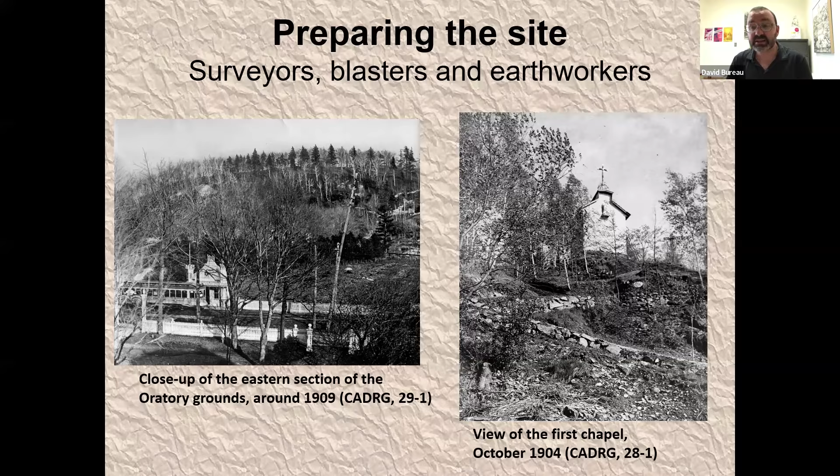When Brother André was appointed guardian of the shrine in 1909, he moved into the small pavilion on the left of the picture near the chapel. With the arrival of the first chaplain, Father Adolphe Clément, the oratory began its activities as we know them today. The monastery for the permanent religious community was built in 1912.

By the following year, 1913, the demand for a larger church had already emerged, supported by $53,000 available in funds. Land surveying work began shortly after.

Brother André personally hired the workers to build the first road for vehicles. 6 or 7 earth workers carried out this work using dynamite. They were also employed for the excavation of the crypt church foundations, which began around 1915.

Father Auguste Dion, the rector of the oratory in 1912, recounts these works in the Oratory Chronicles. I quote, "The blasts that shattered sections of rock to make way for the great crypt church exploded like thunder and machine gun fire one after another."

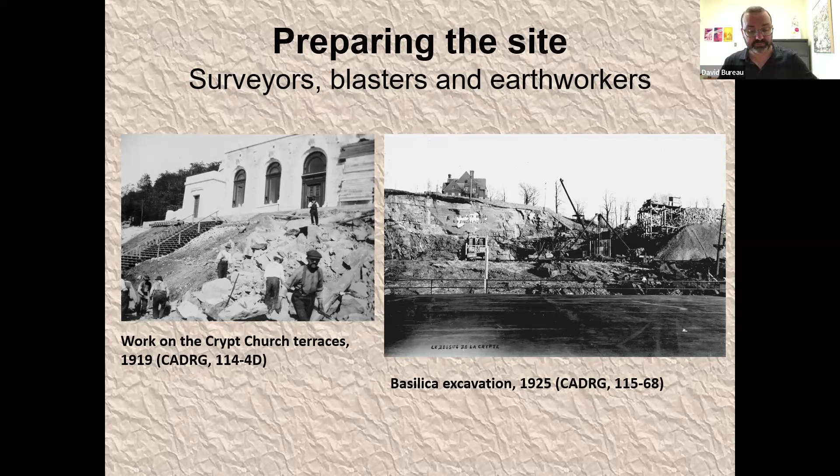The rest of our tour will not always follow a chronological order. We will cover the main features of the principal building: the chapel, 1904 till 1913, the crypt, 1915 to 1917, and the basilica, 1924 until 1938.

So let's start with the primitive chapel. The primitive chapel, the very first chapel, was the oratory's earliest wooden structure. It is the structure you can see on the picture in the center and the right of your screen. It was built by Brother Abondius Pichet, a skilled carpenter born in 1862, who worked at the Collège Notre-Dame.

He began the construction on July 28, 1904, and completed the project by mid-October of the same year. The chapel measured 18 feet long by 16 feet wide and stood 25 feet high. It was a very simple structure, but Brother Abondius covered both the interior and exterior with embossed metal sheet. There was no steeple and no windows, just frosted glass panes that allowed a bit of light to enter. In any case, masses were celebrated outdoors when weather permitted.

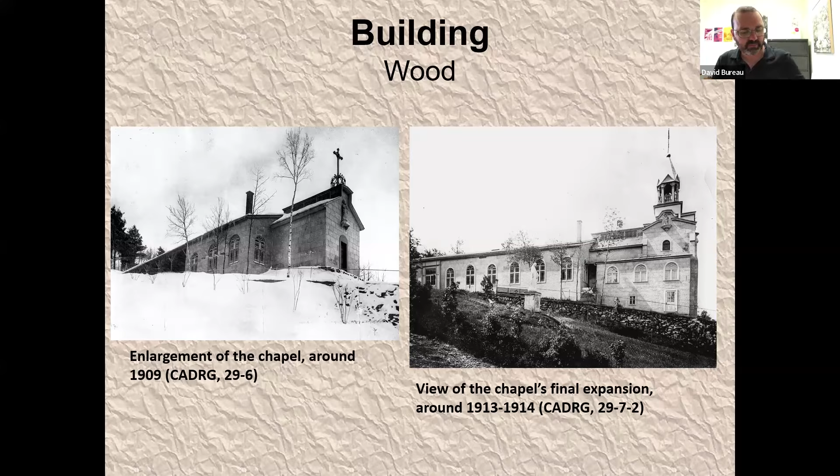It goes without saying that wood was also essential for the framework, for formwork of all the major constructions to come. The crypt church started in 1915, the foundations of the Basilica beginning in 1924, as you can see on the picture, and of course, the dome's formwork in 1937.

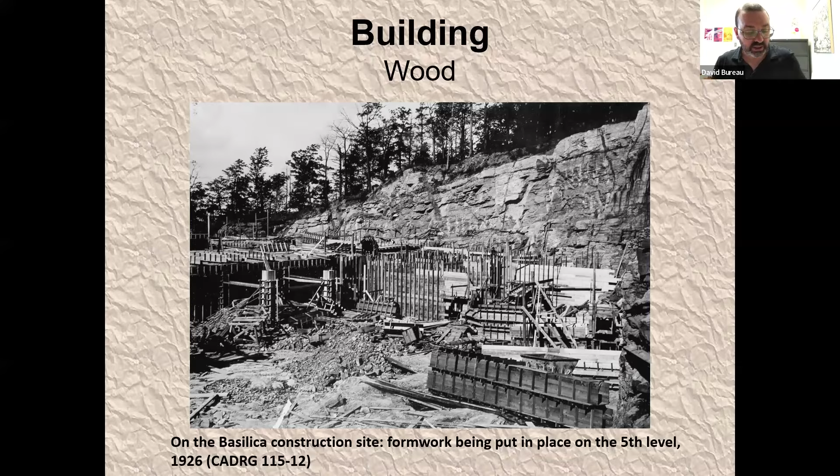The oratory's major buildings were constructed at a time when world events were causing upheaval across the globe, which significantly slowed down construction work. These events included World War I, the economic crisis of 1929, and World War II.

During those times, resources became very scarce. A large-scale project such as the oratory required very tight management of expenses and resources. Throughout these years, pilgrims and friends of Brother André were important pillars for the construction process.

In 1915, Ulrich Boileau and Brothers Company, contractors from Montreal, were awarded the contract to build the crypt church. The cost of construction reached $175,000, not including the interior furnishings, which were estimated at an additional $30,000.

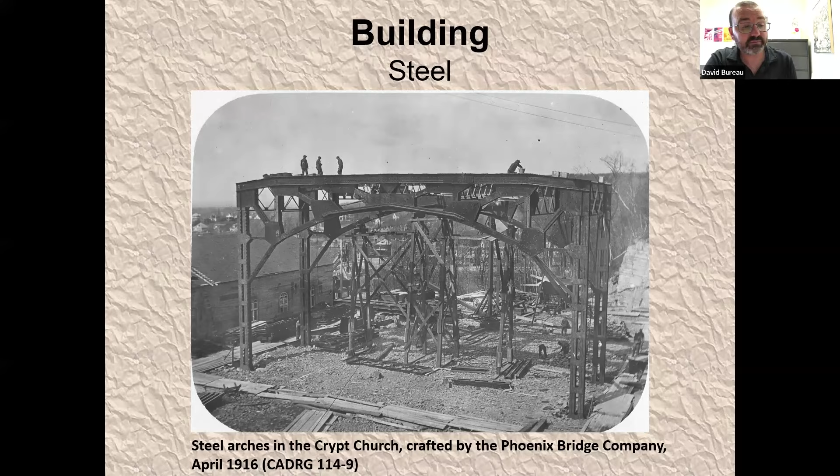Ulrich Boileau erected a steel framework to support the crypt church. On May 14, 1916, during the cornerstone blessing ceremony, the massive steel arches were fully visible. In fact, the celebration was held outdoors, right beneath the imposing metal structure, as you can see on the picture.

Given the expertise of the workers who had built the massive steel arches and were working for the Phoenix Bridge Company, the oratory entrusted them with the installation of the statue of Saint Joseph in the crypt church on December 6, 1917. It is the same statue that we can still see today at the oratory's crypt church.

The annals recount that the industrious workers had already begun setting up the sturdy scaffolding and chains in the heart of the shrine, all necessary to carefully lower the statue of Saint Joseph into place above the center altar.

Steel became the backbone of the basilica's construction, as you can see on this picture. From 1926 to 1937, even as progress slowed and sometimes came to a standstill due to financial hardship, Dominion Bridge Company and their consulting engineer, Ernest Loignon, continued assembling the building's steel structure.

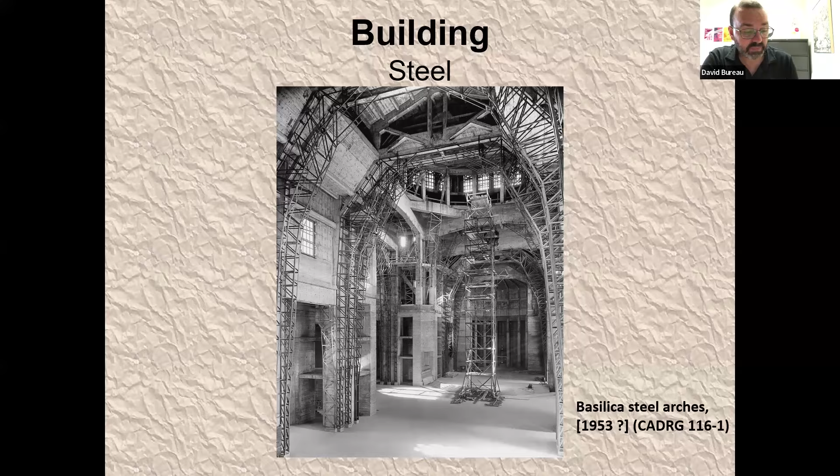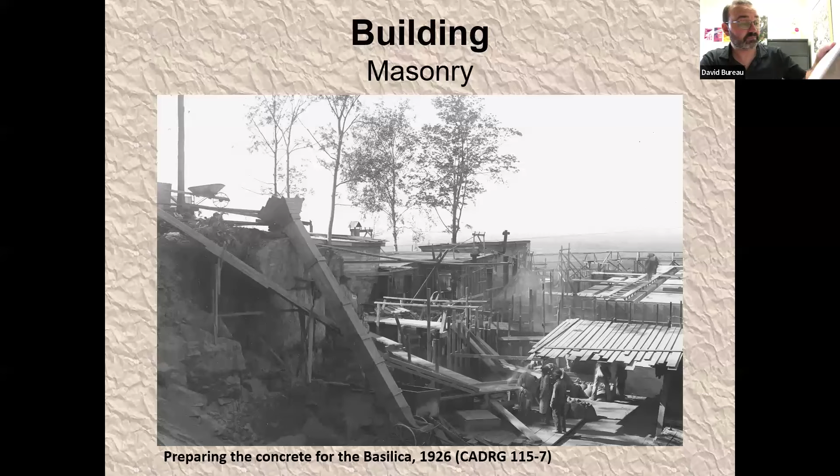Until now, the workers have appeared only rarely in photographs. With the construction of the basilica, the granite walls, and the concrete structure, they increasingly appear in the construction site photographs. Often, these workers were not employees of the oratory itself. They came from construction firms contracted for specific projects. Their names were seldom recorded, but a list dated 1937 gives us a rare glimpse into some names, a few trades, and fragments of their identities.

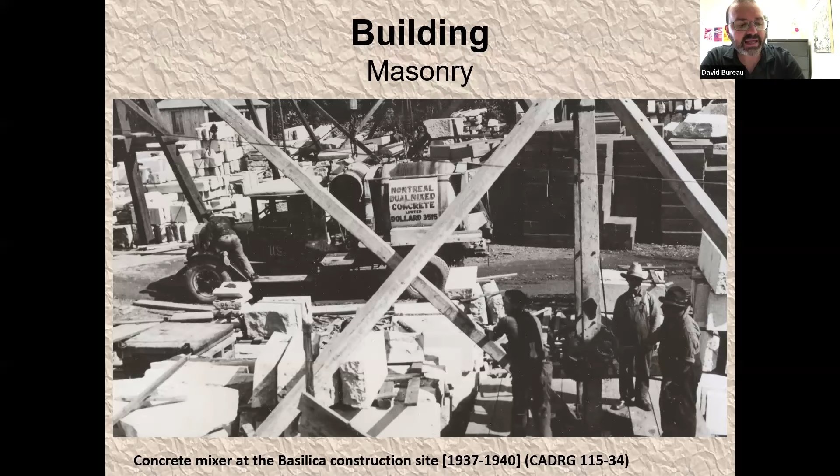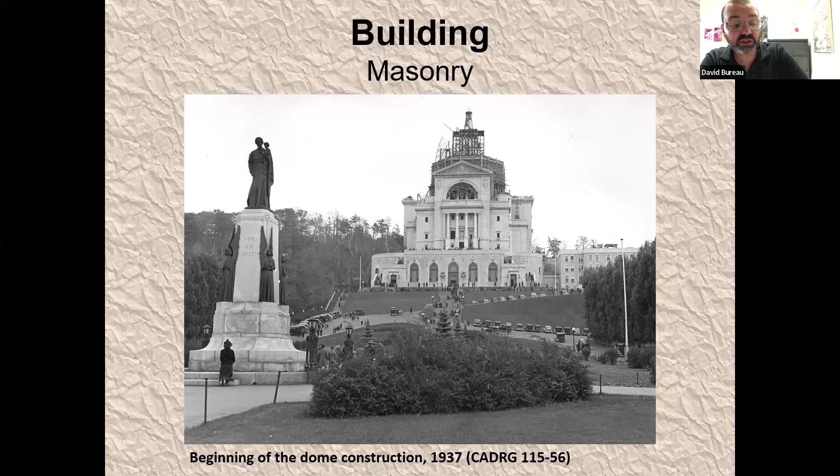As the 1930s drew to a close, the oratory entered a period of intense construction. The will to see the basilica completed was strong, not only among the priests and pilgrims who had nurtured the project from the beginning, but also within the leadership of the Congregation of Holy Cross. There were mounting concerns that delays might lead to insurmountable debt. While progress had resumed steadily after 1934, it was the death of Brother André in January 1937 that brought a renewed sense of momentum. From that moment on, the pace of construction picked up dramatically. The site buzzed with activity.

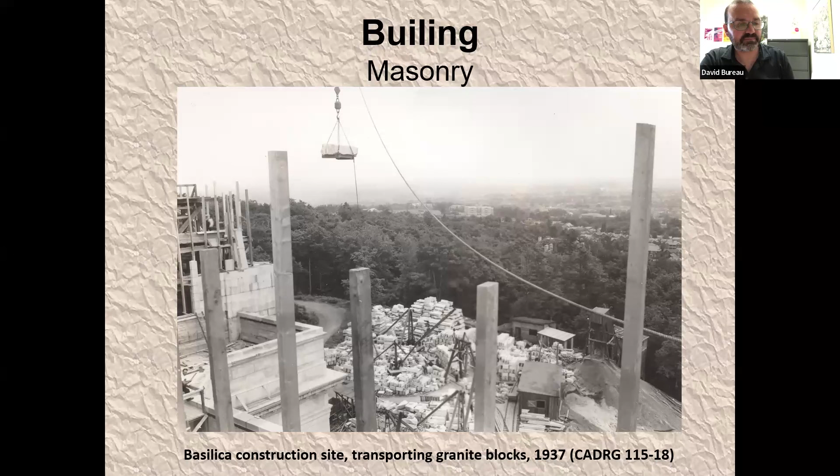Workers from dozens of companies like Silver Granite, Gunite and Waterproofing Limited, Otis Elevator, and Montreal Architectural Iron Works labored day after day. One of the most spectacular phases was the rising granite walls. The stone, a beautiful gray granite, came from Lac Drolet in the Lac Mégantic region in the eastern townships. As early as 1931, construction was underway on the lower floors of the basilica. Granite deliveries came one after another, quickly filling the area around the site. The surroundings were cluttered with stones, blocks, and heavy machinery, all set to feed the steady rhythm of the work. Masons, roofers, construction laborers, each played their part.

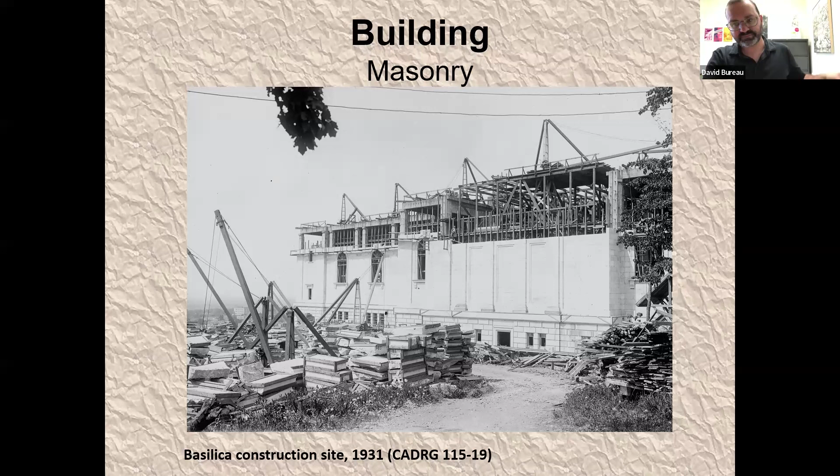We now come to a very important aspect of the construction of the basilica, the dome. A few words to say that its construction was quite eventful. The death of the architect Alphonse Venne before the project was completed led the oratory authorities to terminate the contract with his firm and thus abandon the original design of the dome, which was much more like the dome at Église Sacré-Cœur in Paris, or even the Senate Dome in the United States. Another architect was hired, the monk Dom Paul Bellot, who gave the dome the shape we know today. The dome is the signature of the oratory's silhouette. It was still just a dream when Brother André died. It wasn't until the fall of 1937 that the immense wooden framework needed to pour its concrete shell began to take shape. It is the structure you see now on your screen.

For months, the Congregation of Holy Cross relied on its community, calling on readers of the Oratory's magazine, to help fund this final phase. It was increasingly urgent to protect the basilica, which had long stood open to the weather without having a roof. And every winter, the risk of damage grew more serious.

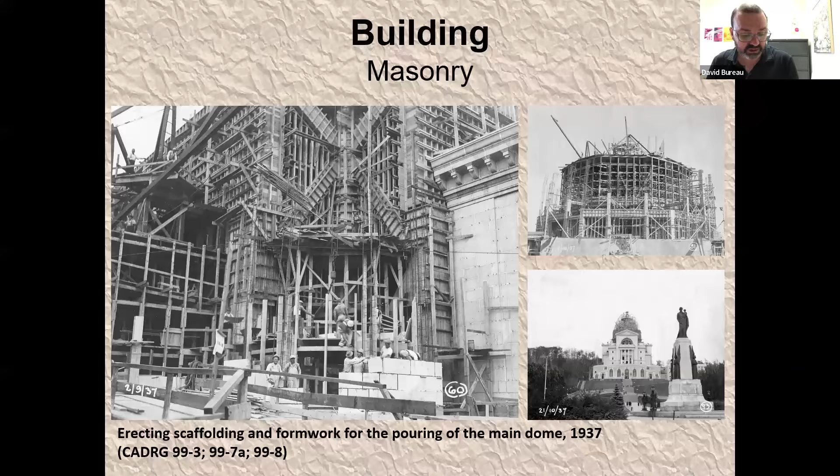It may come as a surprise to you, but the oratory doesn't have just one dome. It has two. The majestic copper-covered dome, seen from miles away, is only the outer shell. Inside it, there is another dome, smaller but no less impressive. It is the one visible to visitors standing beneath it in the basilica, inside. Between the two, a vast echoing void. At the top of the inner dome, a steel framework rises to the lantern perched atop the outer dome. Both were built in solid concrete.

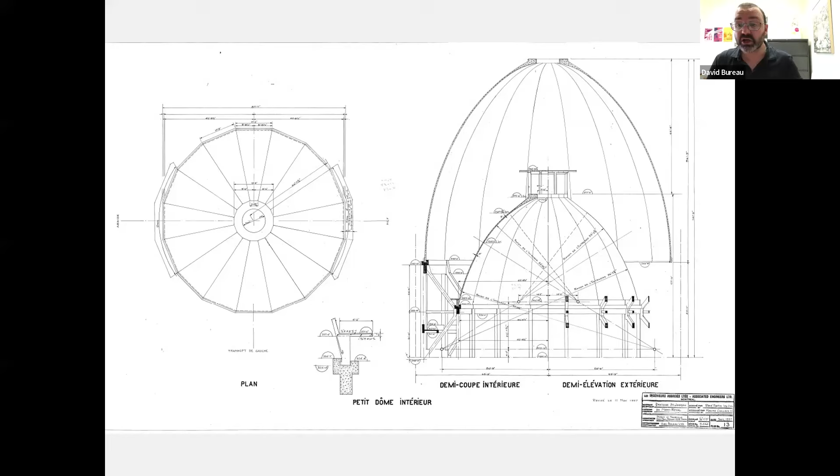From October 18 to 24, 1937, workers constructed the wooden formwork that would hold the concrete for the oratory's main dome, the one we can see from the outside. This was a major challenge, as it was vital not to weaken the concrete. To ensure this, the engineer Maxime Caillou planned one single continuous pour. The machines would pump the liquid concrete to the top of the dome, allowing it to flow down to the base without interruption. Multiple layers had to be avoided. The aim was to create a continuous shell.

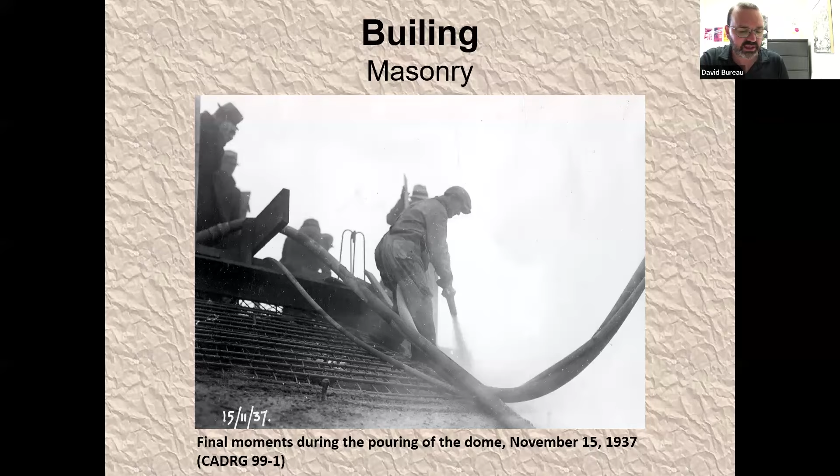So the operation began on November 6, 1937, and lasted 10 days, ending on November 15, 1937. Teams of workers and Holy Cross brothers rotated in shifts to supervise the flow, maintaining the right pressure and ensuring the temperature of the hoses remained constant. Even a slight drop in temperature could cause the concrete to cool and harden prematurely, blocking the lines.

The completion of the basilica does not mean that the oratory is operational yet. There was still much work to be done, including the Gardens of the Way of the Cross and the votive chapel. The oratory will not be truly finished until around 1967, when the decoration and layout of the basilica will be completed. We will now leave the construction site aside and take a look at the maintenance and daily operation of the oratory. What we're about to present relates to the situation of the oratory in the early 1960s.

It is time to discuss the presence of lay people in more detail. Although we do know that as early as 1908, a man who was not a member of the clergy, Mr. Joseph Savage, was working on the maintenance at the oratory.

Up until the construction of the basilica in 1938, most labor was supplied by general contractors. But once the building was completed, the oratory's rectors increasingly relied on their fellow Holy Cross brothers to handle maintenance and upkeep of the site. Faced with the sheer scale of the task, it soon became necessary to reinforce the religious workforce with lay employees, including increasingly lay women. By the 1950s, the number of employees had grown to nearly 200 people.

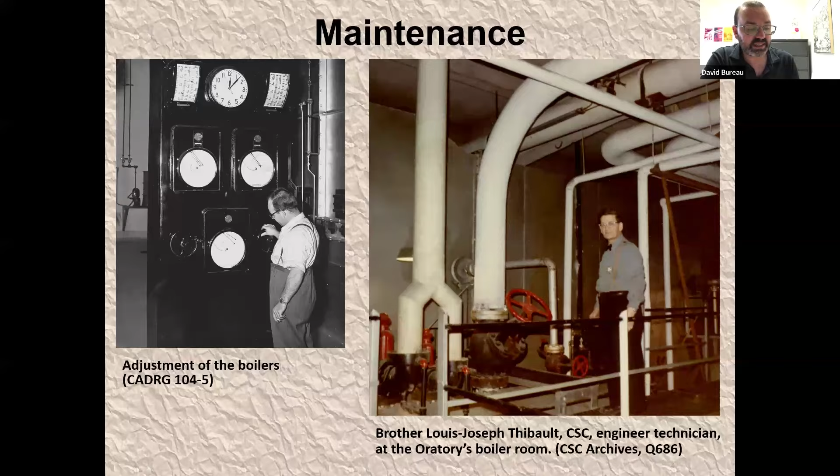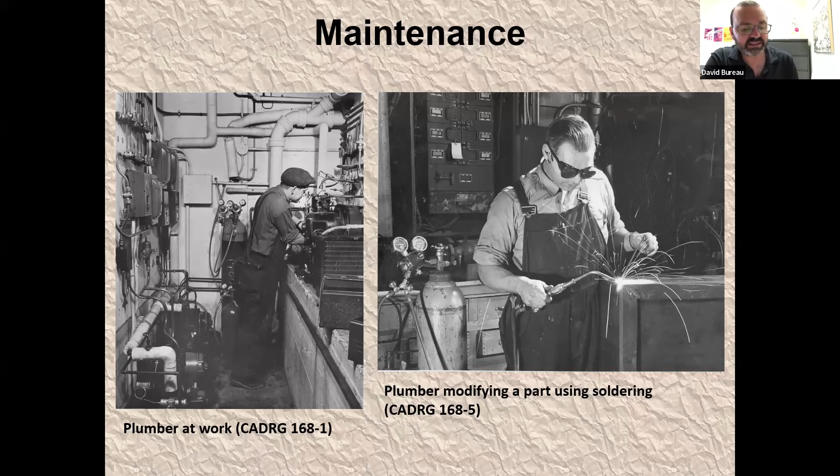Many mechanical and plumbing components were manufactured at the oratory by the brothers themselves. The plumbers were responsible for maintaining 30 refrigeration units and nearly 200 mechanical ventilation systems throughout the site. Plumbing and heating naturally went hand in hand, especially with the installation of the Basilica's radiant floor heating system.

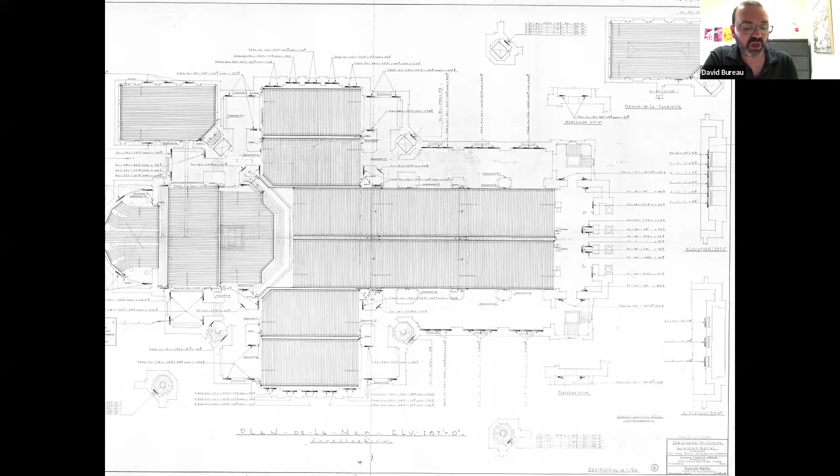It is the drawing you see on your screen now. The black lines that you see are actually the system's heating for the inside of the basilica. This is the plumbing that you cannot see because it's all underneath the floor of the basilica. It was quite innovative for its time, and this system ensured a comfortable warmth to pilgrims throughout the winter months. It was also an aesthetic choice, eliminating the need for bulky radiators along the walls.

The shrine used some 6,000 light bulbs, and it's up to the electricians to keep them all in working order. Their responsibilities included ensuring proper lighting in all interior spaces, like the chapel, the crypt church, the basilica, the offices, the corridors, the restrooms, the museum, as well as overseeing the nighttime illumination of the basilica itself.

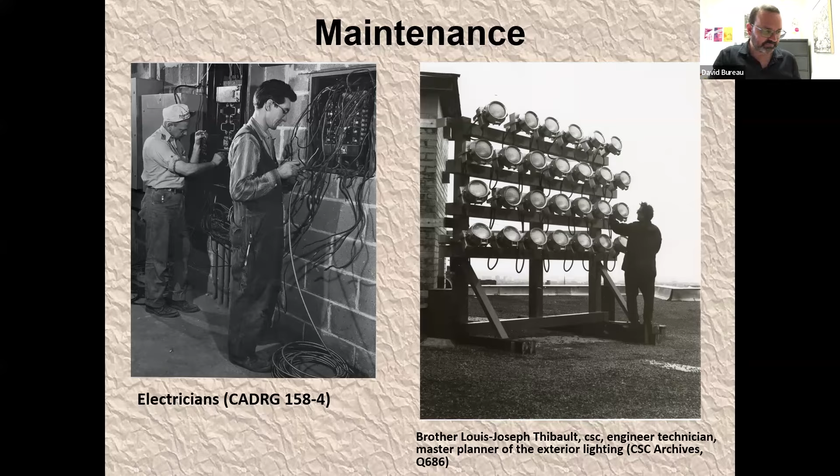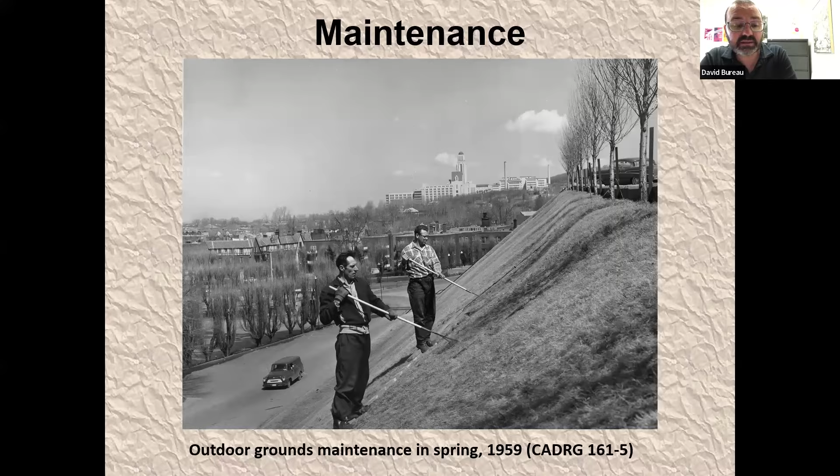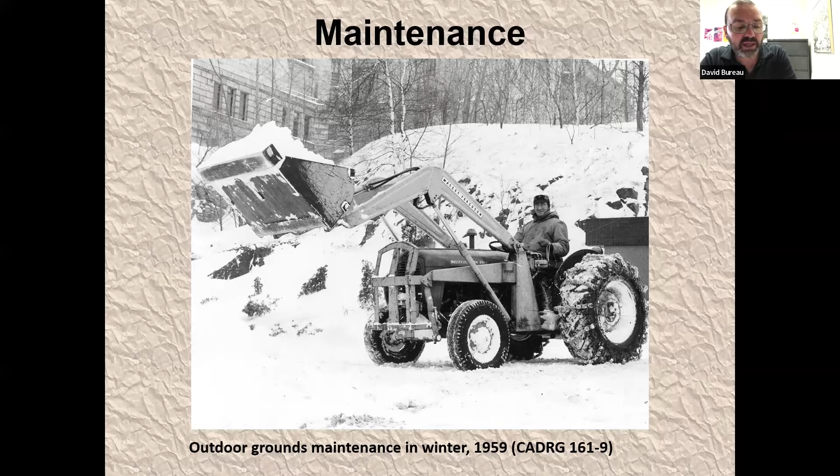Maintenance also includes the care of the oratory's outdoor spaces: flower beds, walkways, the garden of the Way of the Cross, trees, and landscaping, all tended during the warmer months. And the same holds true in winter. The oratory's mission never pauses. It must remain accessible at all times, no matter the challenges posed by the weather.

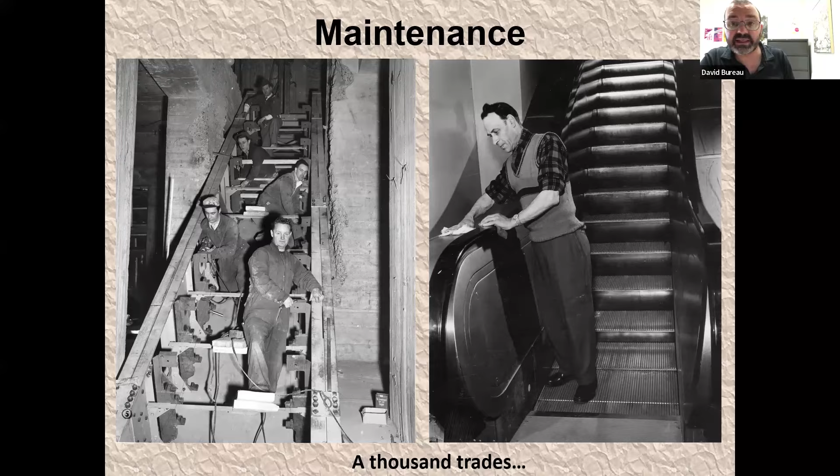A technical supervisor oversees all indoor and outdoor operations and relies on a team of about 25 people who make up the oratory's maintenance staff. There is also a dedicated night crew. Carpenters, painters, mechanics, brothers and lay people worked behind the scenes to ensure that St. Joseph Oratory remains functional and running smoothly every single day.

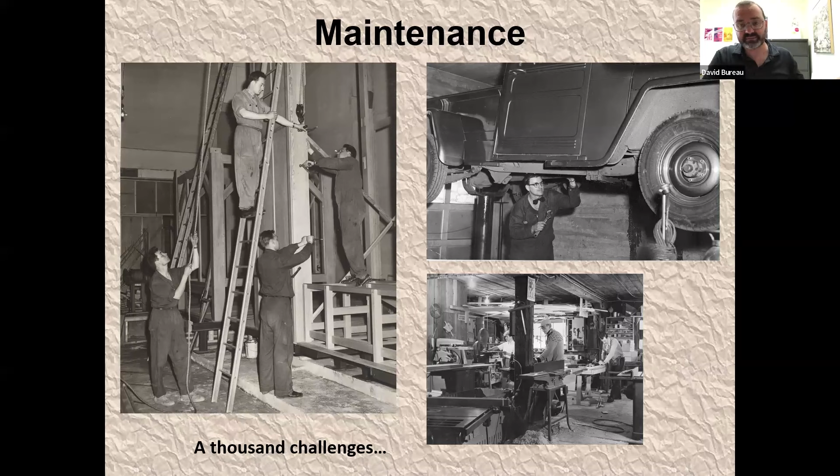We've talked mostly about men up so far. We haven't met a lot of women workers, but this is about to change. Now, of course, we have to keep in mind that Quebec society at that time did not leave so much room for women in the labor market. At the Oratory, this reality is clearly visible in the number of women hired and their tasks. However, women's participation in the life of the Oratory happened more quickly than expected. Some of them were even early workers, as we will see in a moment.

There were no female plumbers, electricians, or painters, but women have been part of life at the Oratory for much longer than one might think. Though they didn't hold traditional skilled trades, many were professionals in their own right, especially in supporting the works of the priests. The first women to work at the Oratory were religious sisters, all from the same well-known congregation, the Little Sisters of the Holy Family, founded by Sainte Mother Marie-Léonie Paradis.